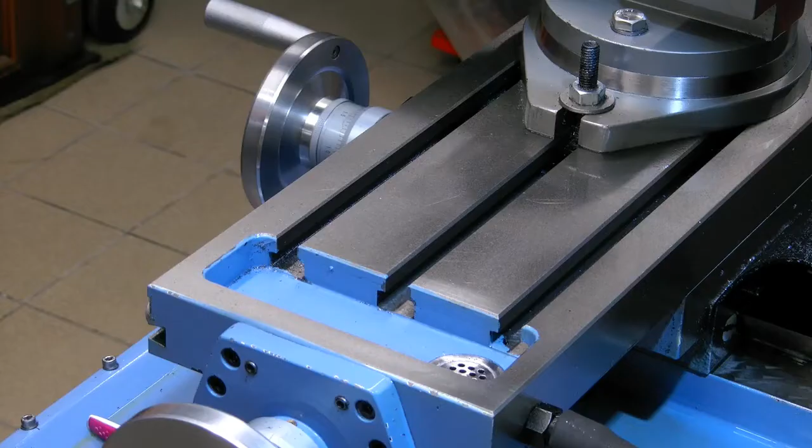Yes, I know there are T-slot cleaners to buy for so little money that it's not worth building them by yourself. But they are all too big for my little mill. So again, we have to tinker it by ourselves.

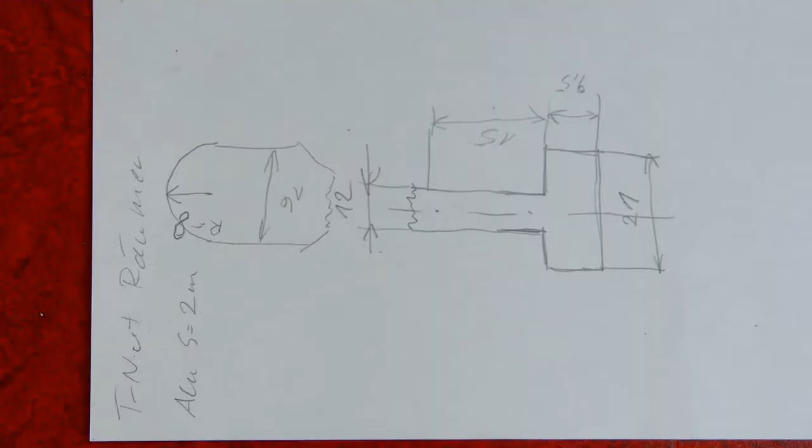We've already drawn a little sketch. This is the part for the T-slot. And at the end we'll make a round that will fit in the end parts of the milling table.

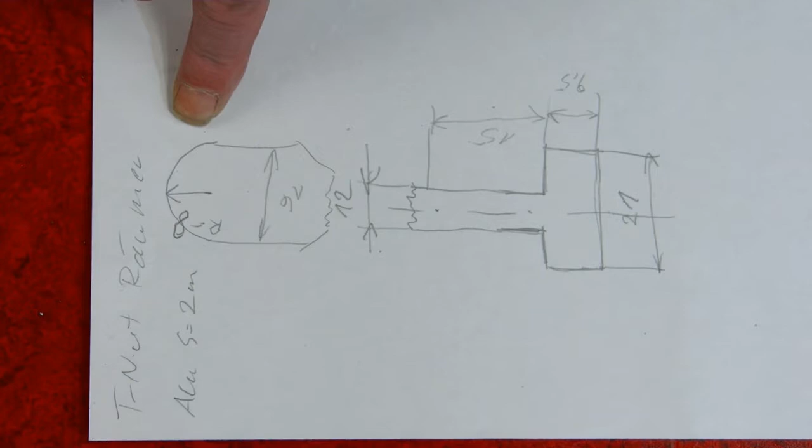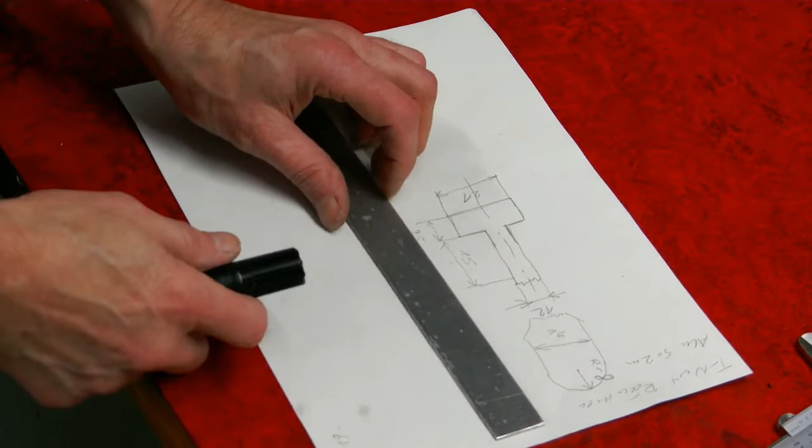Well, now we need to cut it to a suitable handy length. Think about this. I think this size should fit. About here.

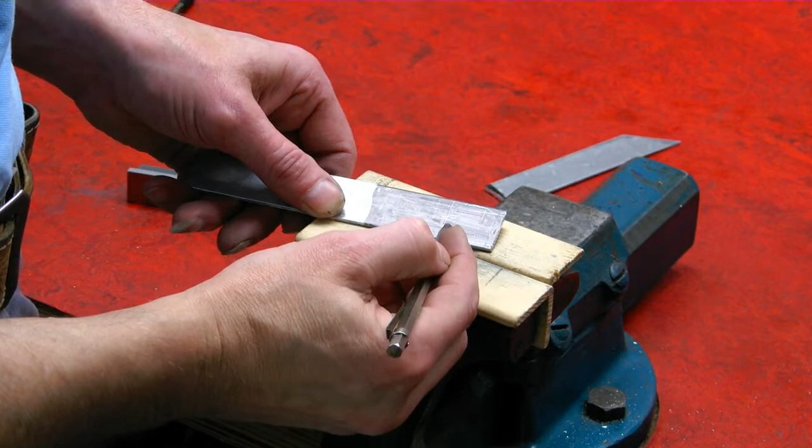Well, nearly at the right angle. That's enough. That's enough. Well, now we marked it a little bit, and now we will saw and file it, and well, let's see how we do it.

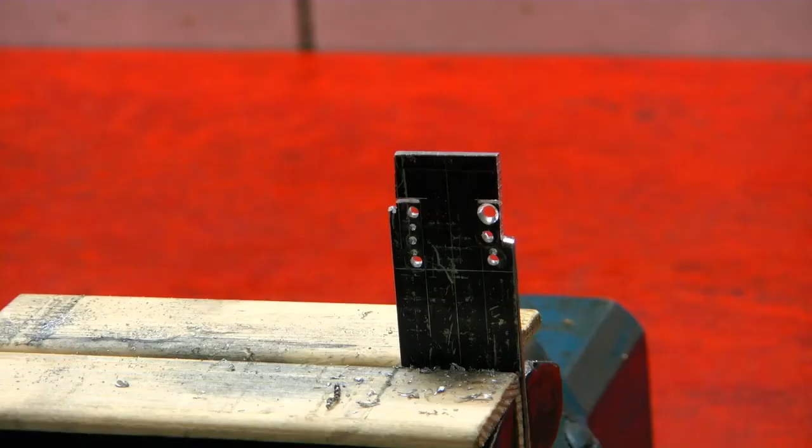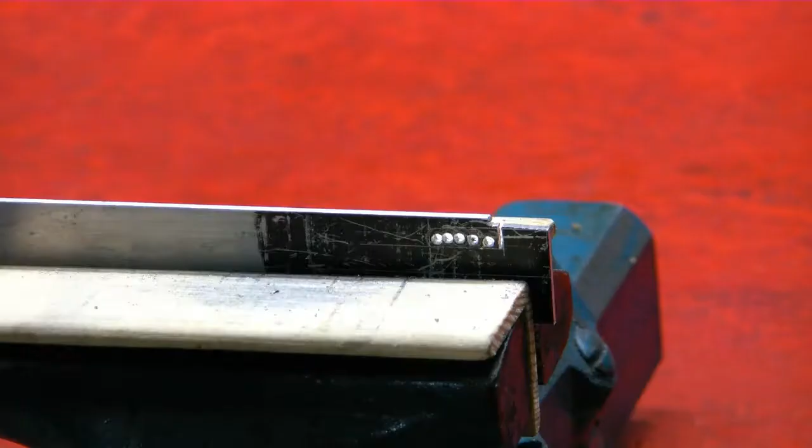Now we just drill a few holes and cut it out. And clean it up with a file. That's gonna be. So now we drilled it. We just need a cut with the saw. Then we pull it out with a plier and a few strokes with a file. And that's it.

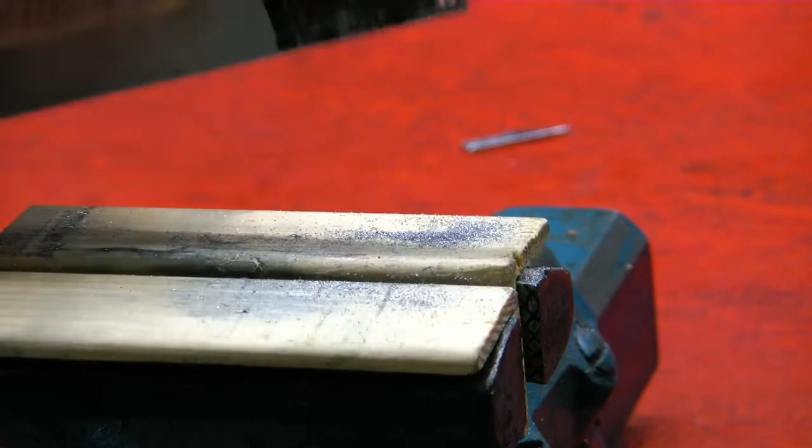Well, now the side with the T-slot scraper is finished. Now we're gonna file the radius. We cut it off with the saw here, and with a few file strokes we have the radius, and then that should work.

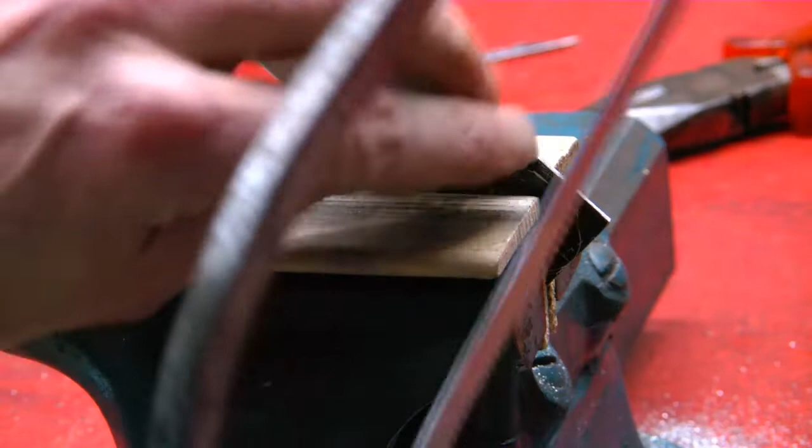Well, we need a radius with about 8 millimeter. That's not that much. I think that we'll have that soon.

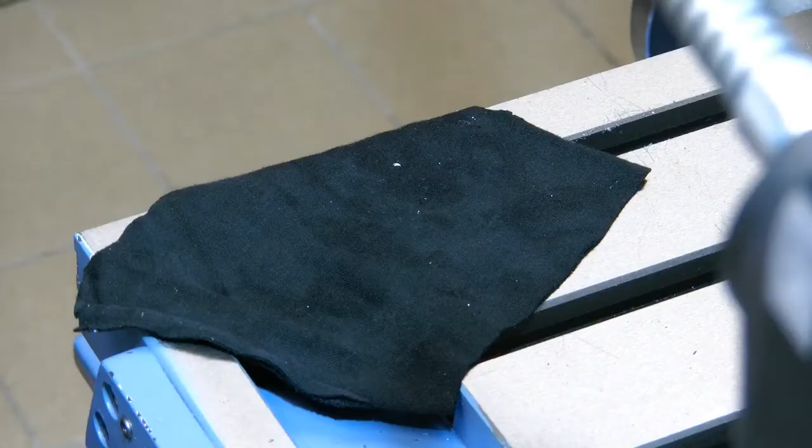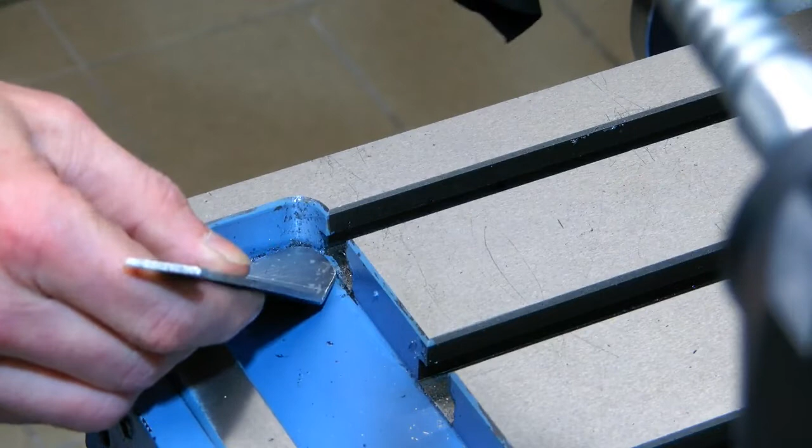Well, finished. Okay, it's not a beauty queen, but it needs to work and not to look good. Well, I bent this in a little angle so that I can reach better into the groove here. So now let's test it, if it works.

Well, it works nearly perfect. Just for scraping out the corner here, it could be a little bit thinner than 2 millimeter, but well, it's just a prototype and it works okay. Wonderful. Another one.